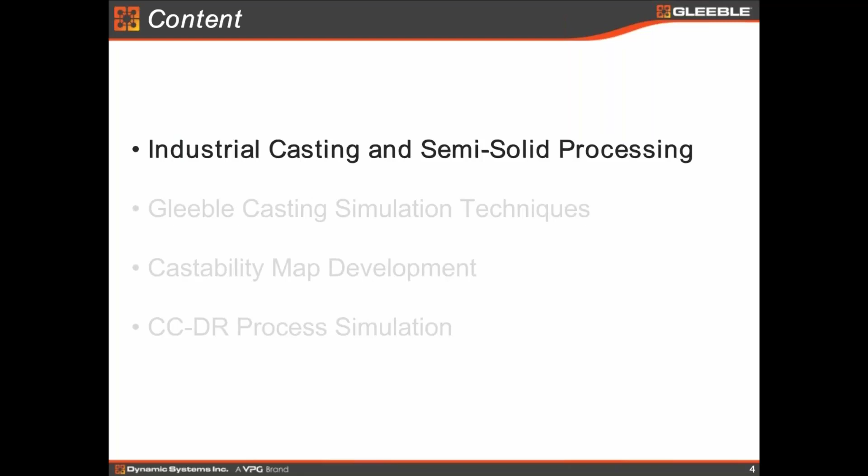So let's talk a little bit about the industrial casting technology development first. We know that casting is a very important part of the steel making process, and in fact, continuous casting is one of the very few technologies that really shape the steel processing industry. As we know now, steel product is really cheap in a way, and that's partly due to the development of the continuous casting technology. And the Gleeble can really simulate the whole process, not just the casting. But today we are going to focus on the casting part of the process.

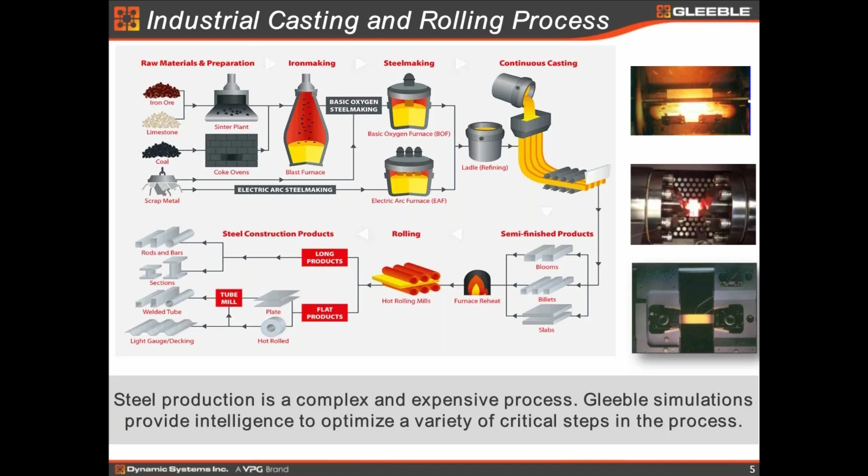Before going further, we'll talk a little about the industry history on casting. Everybody knows about it, but I want to just repeat here a little bit. Casting really in the industry started from 1947 up to about 1974, over almost like 20-30 years.

It's really focusing on the mold casting and the blooming, which means you have to break the ingot to start the rolling after that. And then from 74 to like 89, in about 25, 10, 15 years, continuous casting really started. But then at that time, they were really not integrated. Still needed to kind of separate the casting and rolling, right? So that's why I didn't say direct rolling, still say hot rolling.

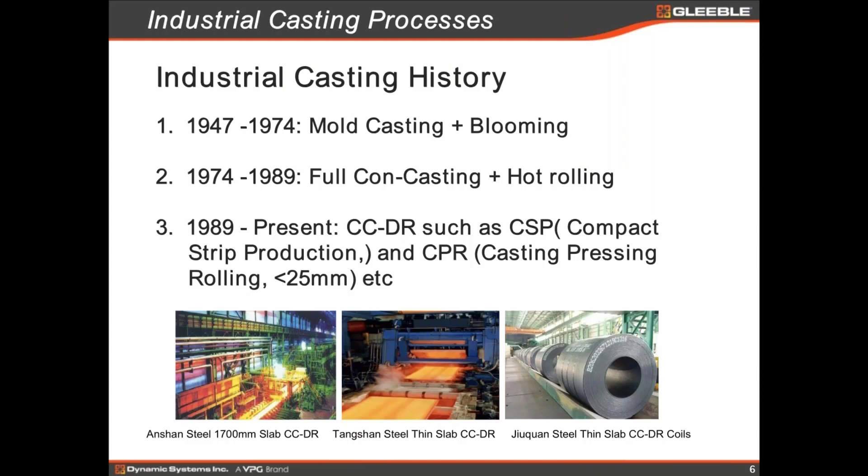Again, casting is just part of the steel processing, so you have to really combine it with the industrial hot rolling as well. But before that, we had hot strip manufacturing or casting technologies developed from thin slab to direct thick strip casting to thin strip casting. But all these things, in order to make the subsequent rolling even more efficient, people are using semi-solid processing as well. In other words, you are deforming the steel billet, no matter how thick it is, while the core is still in a liquid zone. So we call it semi-solid processing.

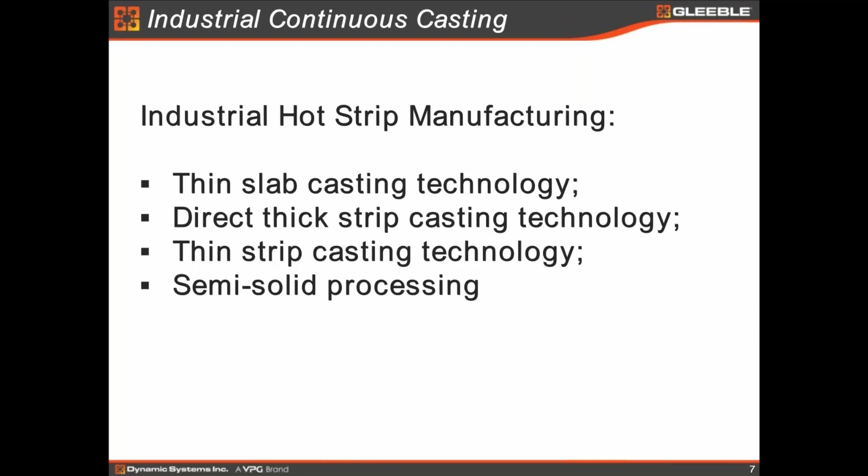Okay, now here are some examples of the CCDR process. From the conventional, we know it's really a slab. Normally the thickness will be around 250 millimeters, and then continuous rolling down to 1.5 millimeters to 25 millimeters thick.

But when the technology develops, especially when thin slab continuous casting technology developed, the length of the production flow becomes very short, from like half a kilometer down to even 100 meters. So this development not only makes steel casting or rolling much more efficient, the key is also that the investment is much less than conventional ones.

So there are lots of technologies out there being used. But again, one thing is very important - no matter what technology they're going to use, as far as I know, I might be wrong, but as far as I know, no technology can produce all the steels in the world yet. So they are still limited.

And that is why we need to use the Gleeble to study continuous casting and rolling to make the castability even better. Specifically, if we are going to develop a new steel, you need to use the simulator in the lab to study before we go to a production trial.

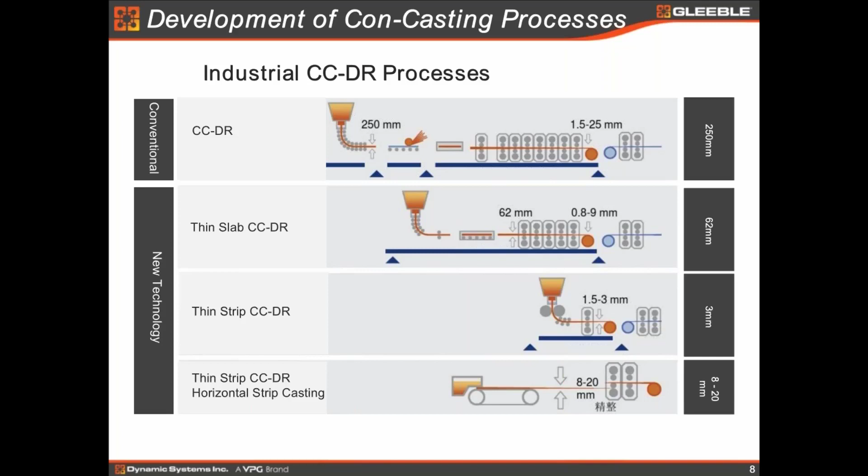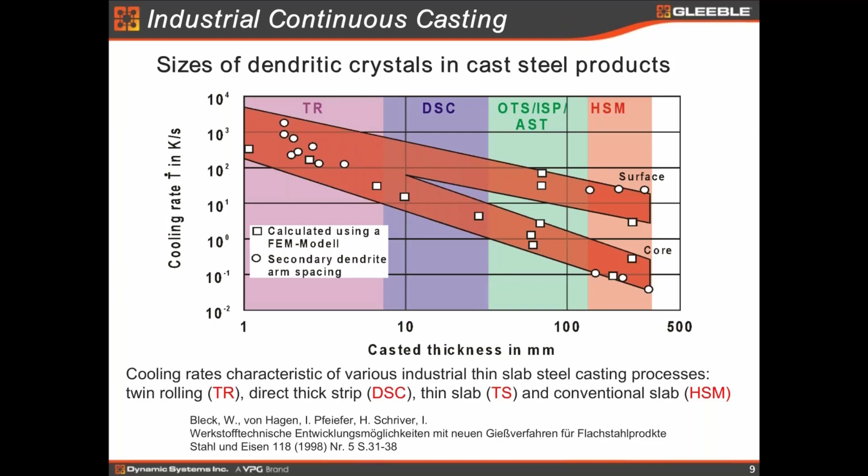And vice versa, when the thickness becomes like 1 millimeter or a little more, then the structure is very fine. And actually, for thin strip casting, the cooling rate you will see in the real production flow could be up to 1,000 degrees C per second. And that is very important to simulate in the Gleeble. We know the Gleeble can quench as high as 10,000 degrees C, so the Gleeble gives us a lot of capability to study the casting and direct rolling process.

And this one shows the secondary arm spacing distance as a function of the thickness. So that's not really something new, but we all know it.

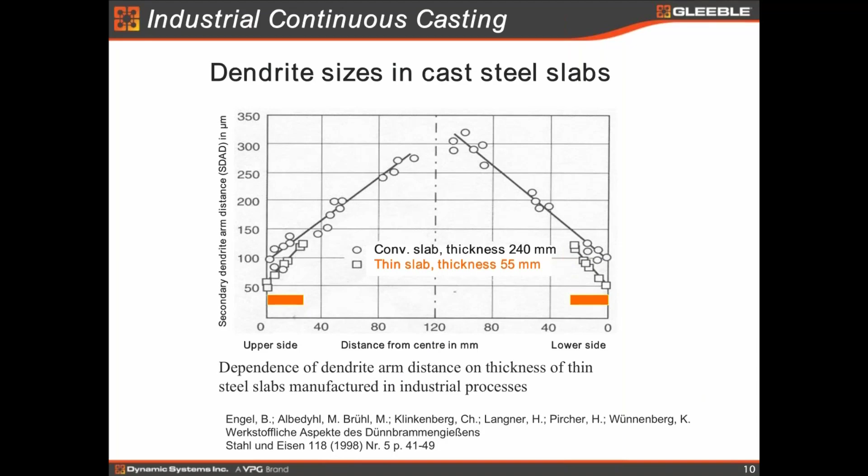So we talk about casting, and we talk about continuous casting and direct rolling. The key here is really, if we want to do continuous casting and direct rolling, we've got to make defect-free billet. If you have lots of defects on the surface, no matter if it's in the corner or the edge, or the longitudinal or transverse, you're not going to achieve direct rolling because you cannot roll the defects into the steel strips, right? So in the conventional way, you have a flame treating, but that's not the way to do continuous casting and direct rolling. So producing defect-free castability is the key to doing CCDR. But the question is how we can achieve defect-free cast slabs or thin strips for direct rolling after that.

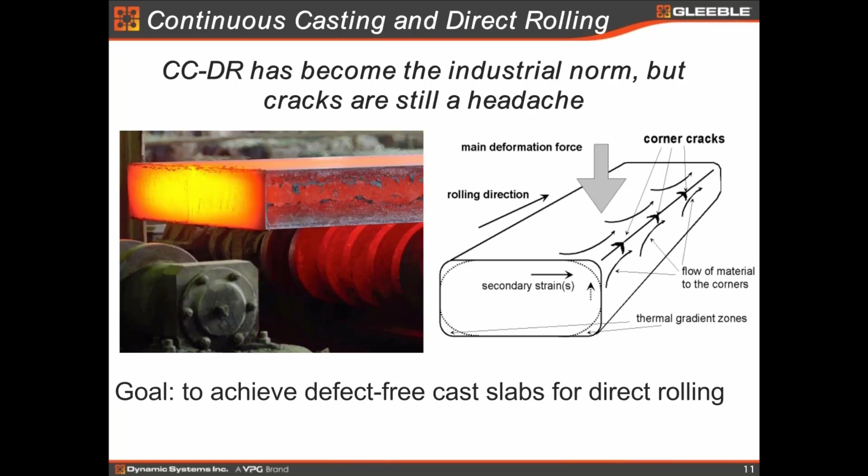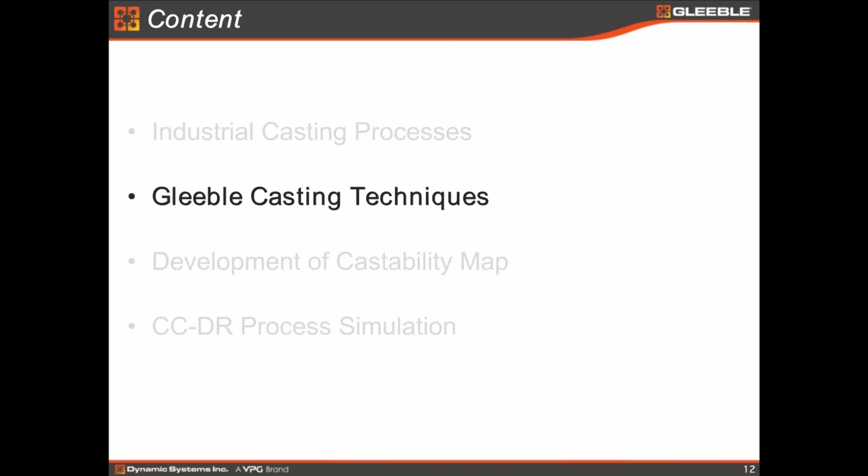So that is why the casting simulation technique is becoming very important. In the next few slides, I'm going to show you some of the casting simulation techniques using the Gleeble. I hope that will be helpful to our researchers to use.

And the first one is what we call flat sample casting, because slab or thin strip casting is all rectangular. So we have developed a crucible that is very simple, just a metal screen, and you put pieces of insulators at the bottom, and you put a quartz plate on top. So you can put a thermocouple at the edge, and then heat it to whatever temperature you want to get it fully melted, and then control solidification. Later on, you can either pull it to check the microstructure or micro defects, and then you can even machine the sample out of it to do the deformation. This can be thick, can be thin, up to whatever sample you have. So it's pretty convenient and very economical too.

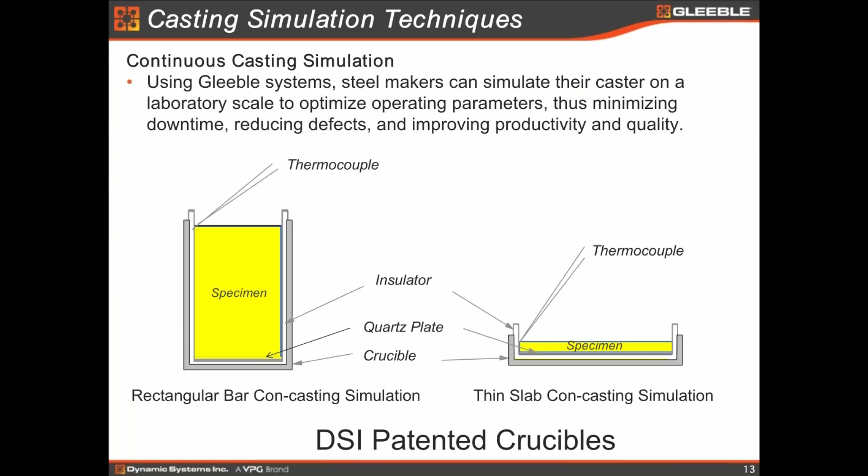This is a very good example of the casting process simulation. In this testing we use a pre-bend specimen. So when you use a crucible that I just mentioned for melting and solidifying, after that you can pull a little bit to simulate the unbending or bending process in the casting process, at a certain strain rate in the range that you want to study. You can also use the quenching spray head to simulate the secondary cooling that you see in the real casting process. After all the simulation, you can check the microstructure, check it to see if there is any defect. You can even cut samples out to do some mechanical or ductility testing.

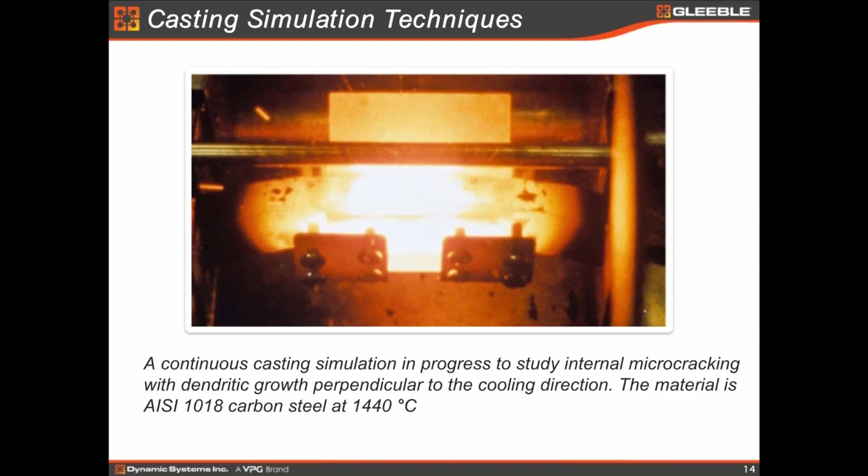But the most popular way that our Gleeble users have been using is really this testing technique. I would rather call it the Dr. Suzuki methodology, because this methodology was developed at Nippon Steel in the early 1980s. He used a 10mm diameter bar, and used a quartz tube to slide onto the cylindrical sample. We know the quartz softening point is more than 1500 C, so for most steels you can simply just melt it to simulate the steel in the mold, and then control solidification to simulate the casting cooling rate to generate the kind of dendrite you will see, and then simulate the unbending process and subsequent hot rolling process by doing the hot ductility test to measure the reduction of area.

That way you will know, for this steel and this kind of casting, during solidification and unbending, bending, or even rolling, at different temperatures what kind of ductility you have, because after all it is ductility that really affects the defects. Everything really comes down to material ductility. And of course you have to have stress — if there is no stress, then you will not have any cracks. So there are lots of things you have to study using this kind of testing, in terms of mechanical stress, such as in the alignment roll or backup roll, and also thermal stress that might be generated during thermal gradient solidification. So controlling the thermal gradient, controlling the cooling rate, controlling the solidification is very important.

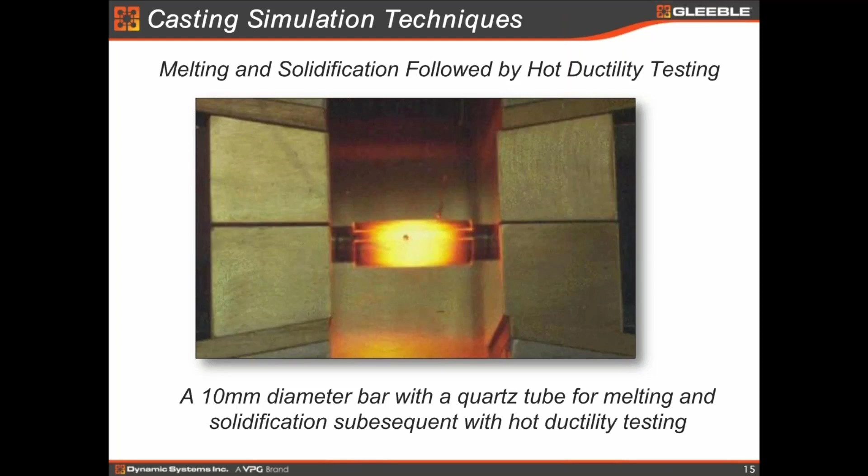So this is a very popular technique that people are using. I would say every steel manufacturer who has a Gleeble uses this technology to develop castability for all kinds of steels, even new ones they are developing. I will talk about the castability method later, but for this testing technique alone, I want to share some of my experience with you guys, because after all this test is not that easy since it involves melting. When you're dealing with liquid steel or metals, some beginners get kind of nervous. But we have been using this for almost 30 years now, so it's not really a big deal, though there are still some tricks you need to be aware of so you can make your test kind of routine.

So the key here is this: firstly, before melting, I would definitely suggest you slow down the heating rate, because otherwise controlling the liquid will be tough. As you can see, we have a lot of holding time. You can manually adjust the melting temperature or casting temperature, and then control solidification.

There are some things I want to mention here. Firstly, as I mentioned, we use a quartz tube, so the size of the quartz tube is very important. If you do not select the right inside diameter, the quartz might break if it's expanded too much. A rule of thumb is, if you know your steel's thermal expansion coefficient with the phase transformation, you try to estimate the final diameter you would have at the melting point. The inside diameter of the quartz has to be a little bit bigger than that. Otherwise, you would break the quartz, because quartz is very brittle.

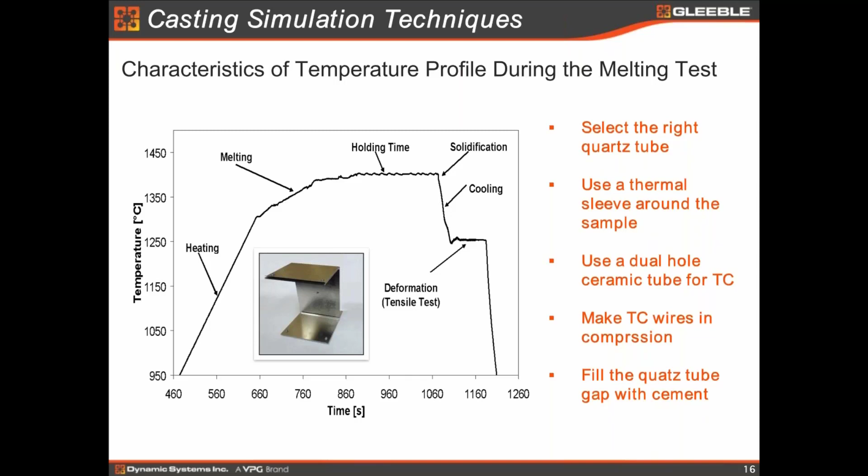So these are the tricks I hope will be helpful when you do this kind of melting solidification test. Now I will explain in more detail how to use this technique to develop a castability map, because after all, you need to tell your cast operator how to cast your steels, whether it's the current one or a newly developed one.

So let's come back to the test methodology using this Suzuki method. Normally you could use this kind of methodology to do that. This left one is really to simulate the casting and the direct rolling. So what we do is heat the specimen up until melting, and then control solidification to a certain temperature, whatever it's in during the casting temperature region or during the rolling region.

You can do all types of testing to measure the reduction of area, the ductility, and then at different soaking time, strain rate - all these factors you can put into consideration. That way you can have a ductility versus lots of factors in terms of temperature, strain rate, holding time, and all that. So that is the testing method using the Suzuki method.

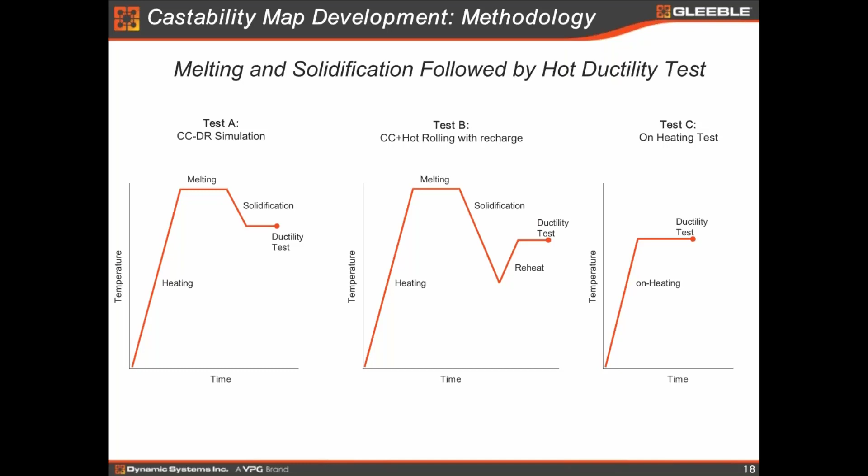And by this design, you can know how bad this casting ductility is. We all know the material ductility will become very bad when it's heated. And actually, the fact is the higher the peak temperature, the worse the ductility is. So melting, of course, is the worst. That is why the melting is so important.

And if you see the low ductility, you want to know why. I mean, you only know the origin of the low ductility, then you can improve it.

So at Nippon Steel, they use SEM, of course. I always say the Gleeble is the bullet making machine, and SEM is just the machine that takes the Gleeble sample as a bullet. Without a bullet, the machine gun, or the SEM, is useless in a certain way. So Gleeble really can generate lots of samples for your SEM because it's even more useful. So to study the origin of the low ductility, you need to check the fracture surface. By examining the fracture surface, you know why there is low ductility.

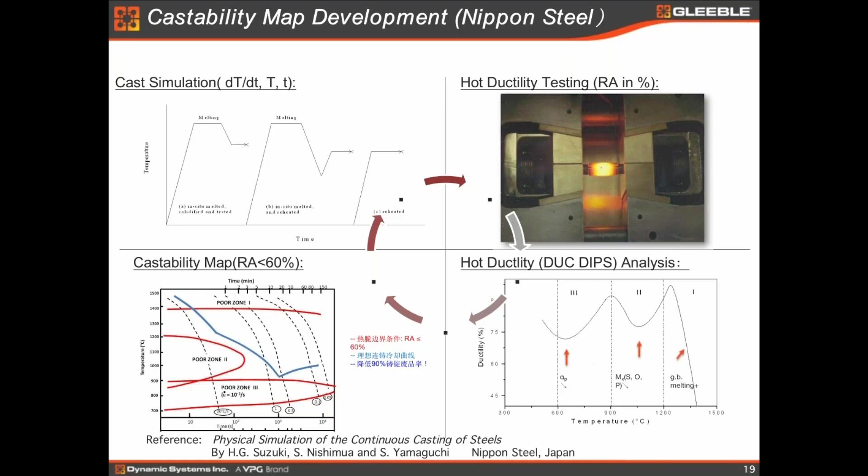Their surface treatment rate dropped from 45% down to less than 5%, which makes CCDR a reality. For all new steels being developed, you have to develop a castability map before telling your caster operator how to cast, because speed relates to strain rate in terms of Gleeble simulation, cooling rate, and solidification rate. It's all important, including when to unbend. This technology is very important, and I hope it's useful for your new steel development and casting.

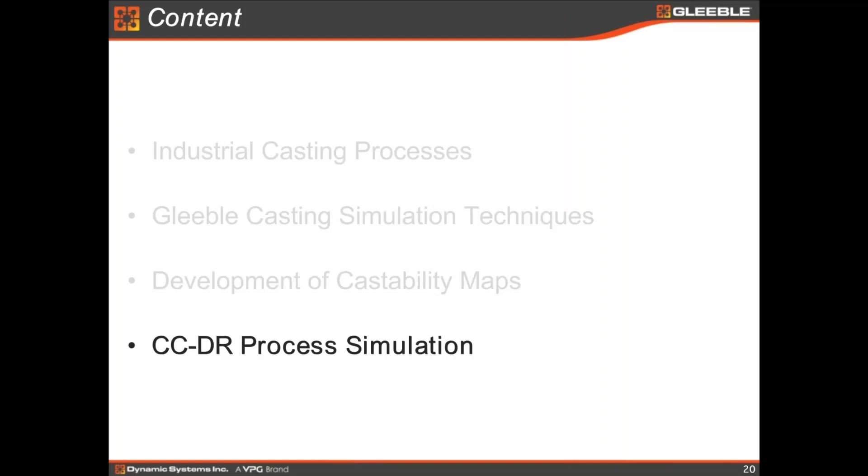Now I'm going to talk a bit about continuous casting directly, because after all the metal has to be processed to become the final product our steel customers can use. From this figure, you can see the history of casting and rolling. From the right, that's the older method, probably from the 1940s to 1970s.

People did cold charging — you cast it until cold and reheat it through the walking beam furnace. Later it became what's called hot charging, to save energy and time. Then we got direct hot charging, just like the second schematic testing scheme I showed in the previous slide. Now almost everybody uses CCDR to produce all kinds of strip thickness using hot strip mills, whether 5 stands or 7 stands, depending on the thickness you want to produce.

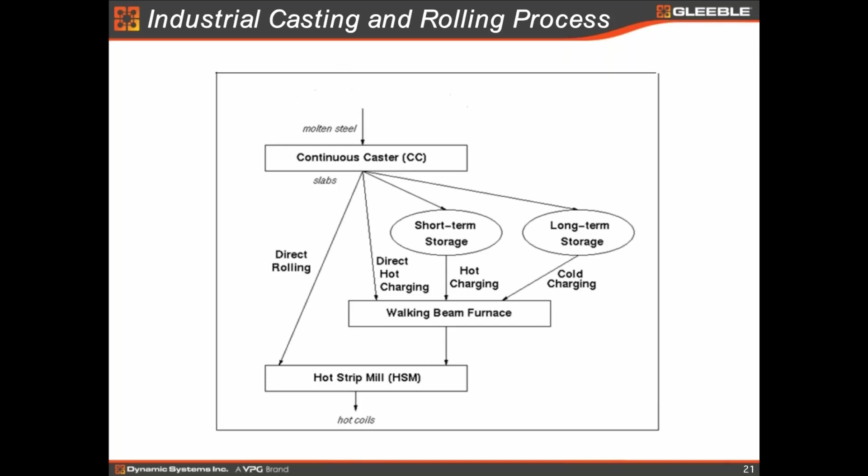Fortunately, DSI has developed a CCDR simulator, called the HDS V40. HDS stands for hot deformation system, and V40 means vertical 40-ton machine. We use a very large sample — a 10 millimeter thick, 50 millimeter wide, 250 millimeter long specimen, depending on the free span you want to set.

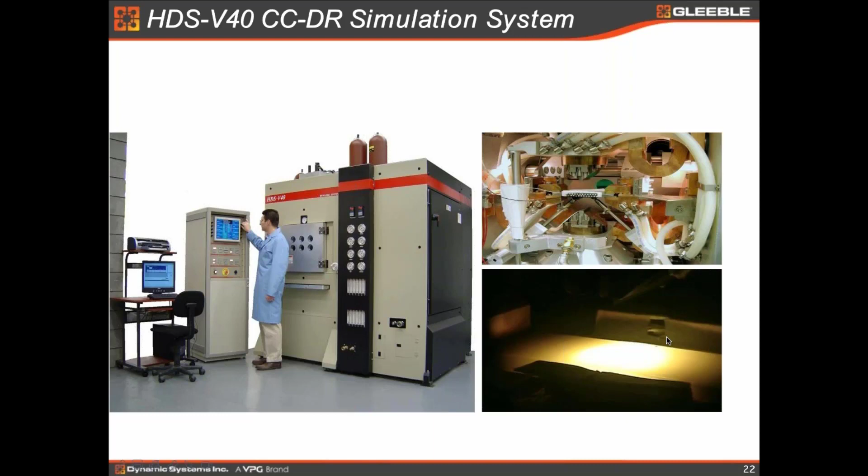You use no crucible, which is really nice — you can bend it to whatever shape you want for testing. It's very economical, very cheap. You can heat it to whatever temperature you want. Now I'll show you a video simulating the CCDR process on the Gleeble HDS V40.

You see it's heating up a bit slowly, but you'll see a molten zone forming in the center. You'll even see some gas popping up, and the center molten zone is generating gradually. You can get this formed without a crucible, as long as it's not in a vacuum — normally inert gas is better. So it's kind of fully melted — you can see it bubbling in the center.

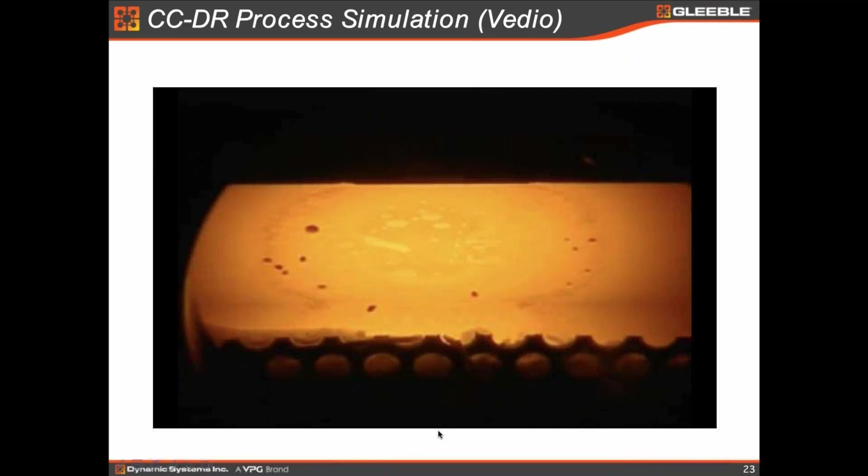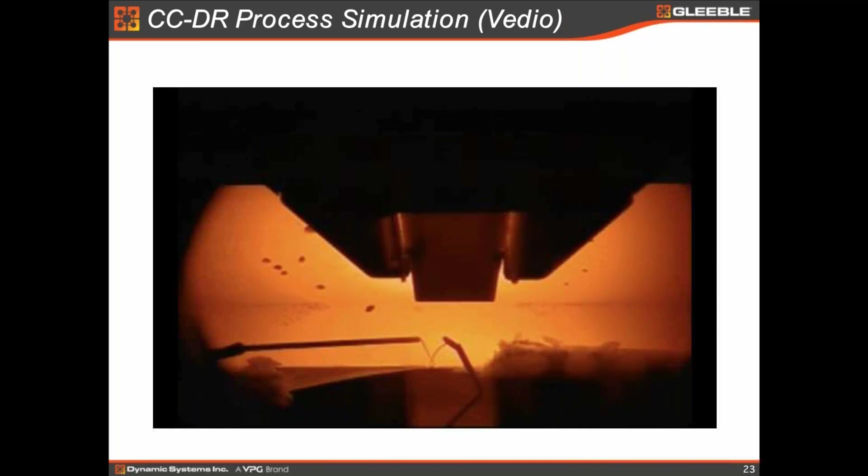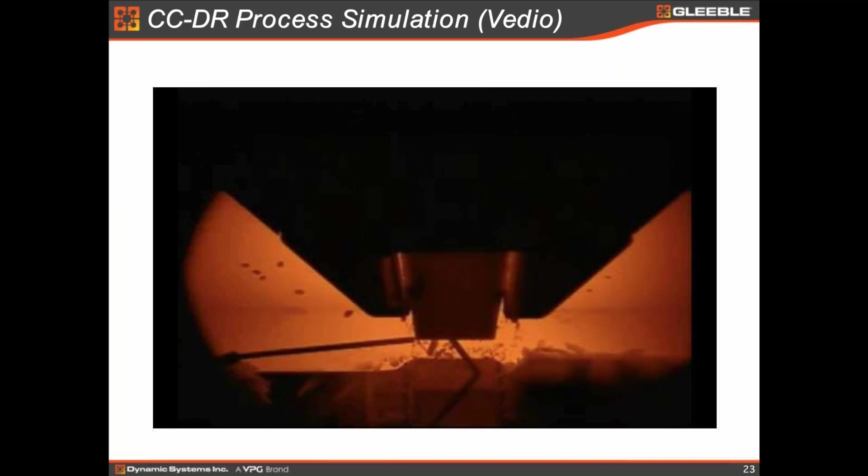Then you control the solidification, and afterward you can do the direct rolling right away, since it's all in-situ simulation of the CCDR process. You can do as many hits as you want — 1, 2, 3, 4, 5, whatever. It's not a problem. We can control the temperature, the strain, the strain rate, and the interpass time, just like in your real process flow.

This photo is shown deliberately to show the kind of liquid we deformed while the specimen is still in the semi-solid region, so you can see some of the mushy zone. But as I'll show you, you can deform at any temperature, any strain rate or strain you want. You don't want to really make it mushy, but I propose to do this because the HDS can do whatever you want to simulate.

After that, I want to show some of the microstructure of the melting and solidification with two kinds of cutting: one, the flat section parallel to the surface, and a longitudinal, vertical section, which we call the long section. Then we will examine this microstructure from 1, 2, 3, 4, 5, from the solid to the as-cast structure.

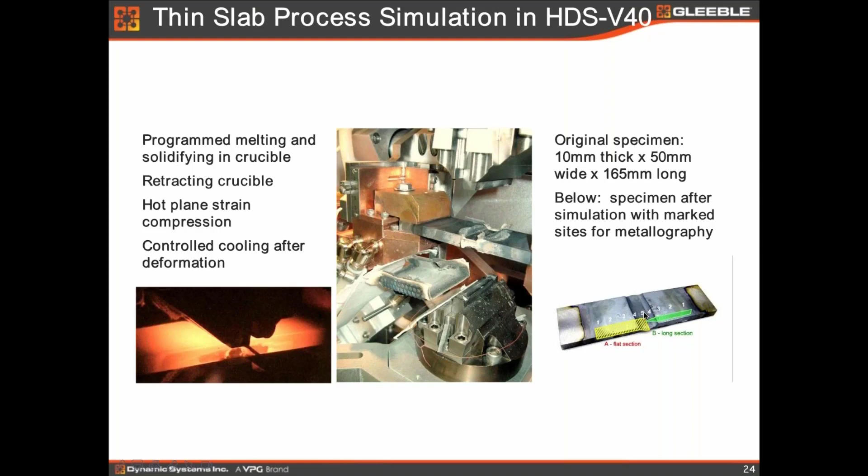Here you can see in the long section from 1 to 3: zone 1 is solid, about 1,300 degrees, and we see a normal Widmanstatten-type structure, but we have preserved non-metallic inclusions. This is to show you why it's changing at a different temperature, like in zone 2, where you see some non-metallic inclusions have become fragmented.

This is because of the mushy zone, the semi-solid zone. In the fully melted zone, which we call zone 3, we see dominant spherical inclusions along the boundary of the columnar dendrite. In other words, we can generate columnar microstructure or as-cast microstructure.

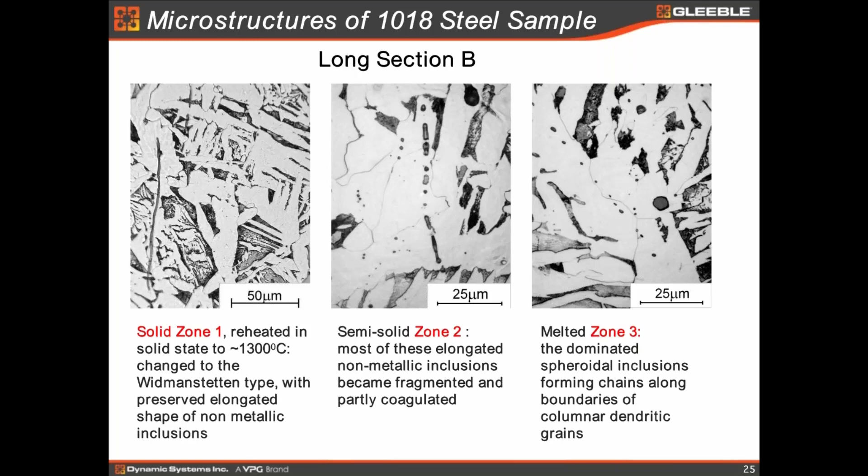If you want to see the flat section A, after the deformation, section A, zone 5, is the deformed zone. We can see it's a very common ferrite-pearlite structure. If you want to see in more detail, you see ferrite, lamellar pearlite there.

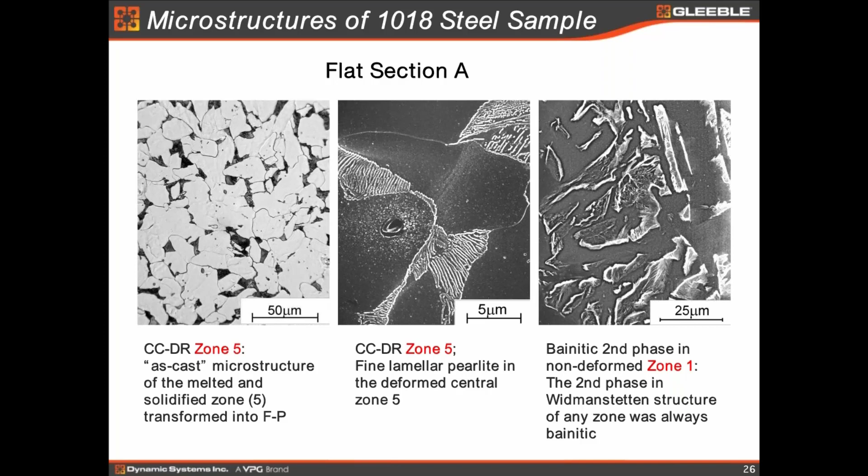Actually, in most of the as-cast deforming zones, we see bainite as a second phase in all these zones. Even in zone 1, we see the second phase of the bainite structure. So again, as I said, this simulator can simulate all kinds of casting procedures.

This machine can actually, as a feature, shift the specimen longitudinally. In other words, you don't have to deform in the melting zone. You can shift the sample sideways to deform in a different zone. That's possible. But I want to make a case study for a steel with low carbon, 0.07 carbon.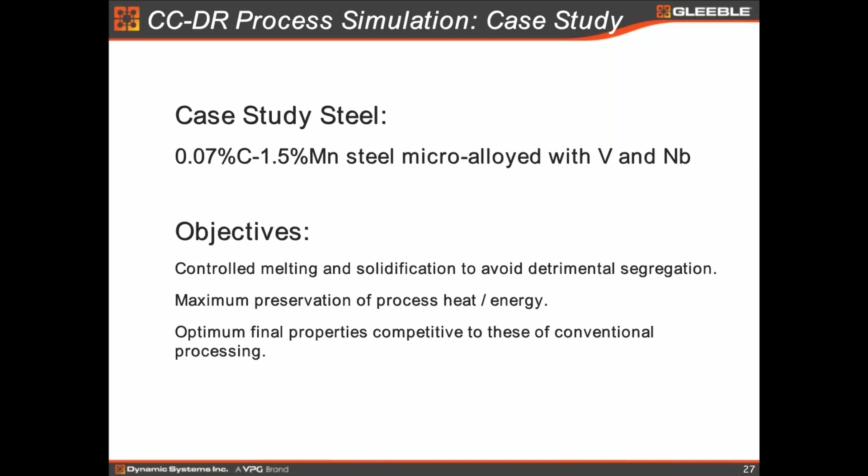With 1.5 manganese, micro-alloyed with vanadium and niobium, to do some deformation simulation, casting deformation simulation, to see the microstructure and the flow stress. One sample we heat up to 1250 with two hits: 0.35 strain at 1150, and 0.55 strain at 1000 C. The second one we heat to the same temperature, up to 1320, with the same two deformations.

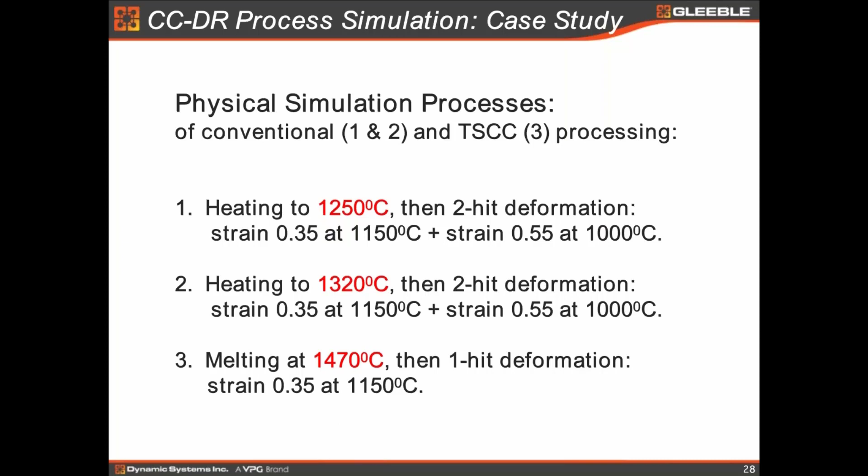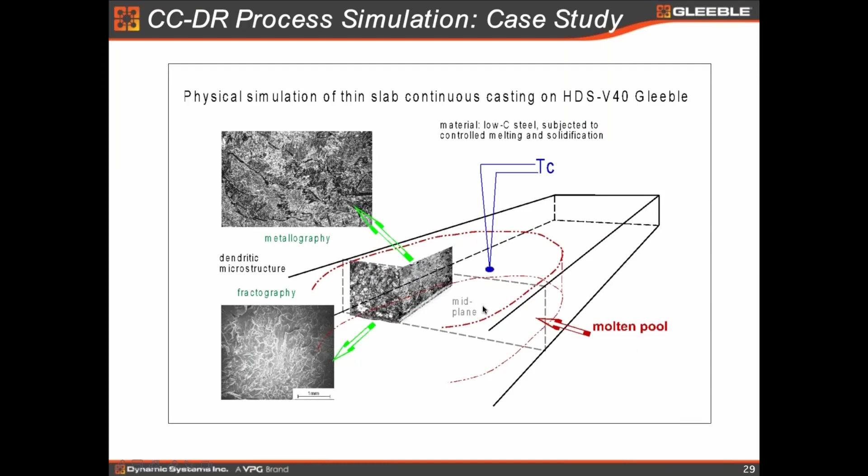The third one we heat up to 1470 to melt the sample and do just one hit at 1150, 0.35 strain. So we will cut the specimen crosswise, which we call the middle zone, middle plane, and in the longitudinal direction to see the microstructure.

You can see, after melting and solidification, we see columnar structure with ferrite segregated along the grain boundaries. So you see the grain size of the columnar dendrite grain size.

If you want to see the inside structure, within the dendrite grains, we actually see some kind of rib-like structure.

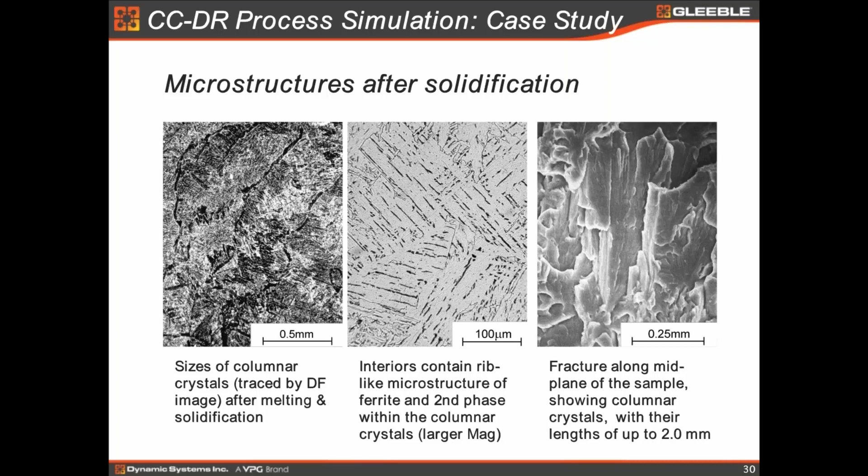If we cut the specimen along the middle plane, we actually see a dendrite grain size of up to 2 millimeters, which is very close to the dendrite grain size that we see in the real thin slab casting process, about a 25 millimeter thick slab casting. So again, the HDS is really comparable to what you see in the real casting process.

Here is the flow stress curve that we measured at three different peak temperatures. What we can see is, of course, you can do multiple hits, about 5 or 7, no problem, because the HDS also has a feature of hydraulic control, so you can control the strain rate and temperature intervals very well.

Here what we see is the finer the grain, the larger the flow stress you observe. You see the low flow stress at the 1470 melt zone. We deform at the same temperature; the only difference is the grain size. So the finer the grain size, the larger the flow stress you get. The same for the 1000 C deformation, heat at 1320 and 1250.

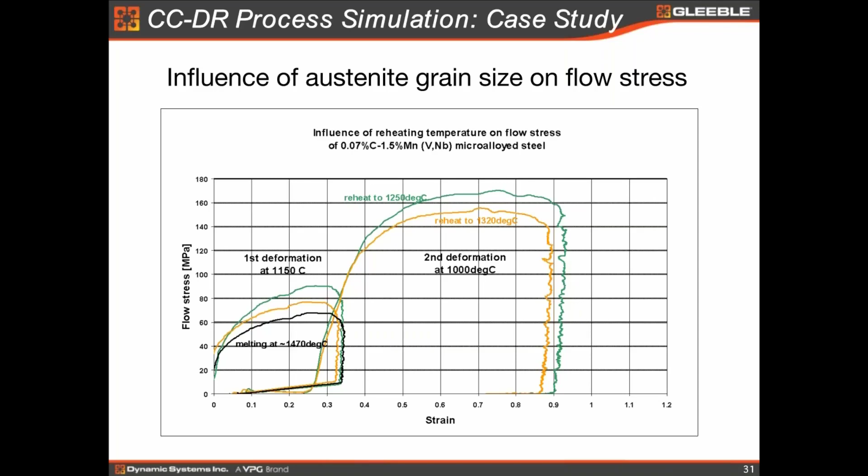That's why we need to make sure of the peak temperature that we simulated, because it affects the deformation resistance that you will see during deformation.

These are the microstructure photos for process 2 at different temperatures and different strengths. D is the deformation zone, and this is the non-deformation zone. You can see the structure after deformation.

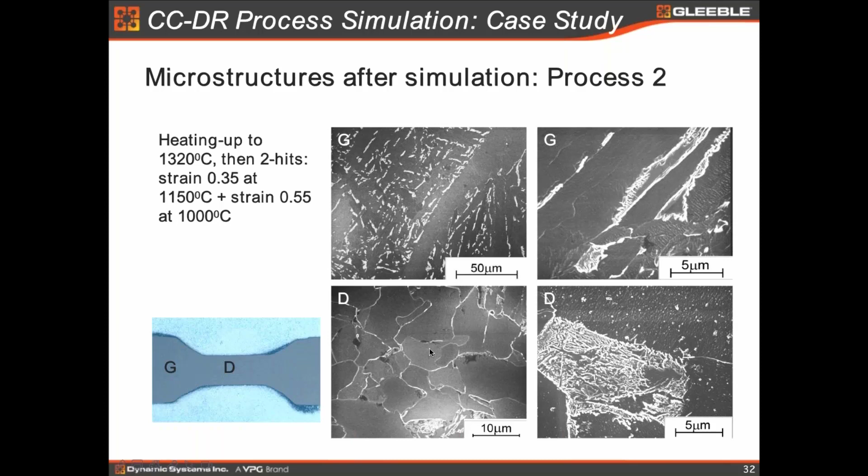The same for process 3, with as-cast and the solidified deformation structure. These are the things that the Gleeble can do to check the microstructure, because after all, it is the microstructure that decides the mechanical properties.

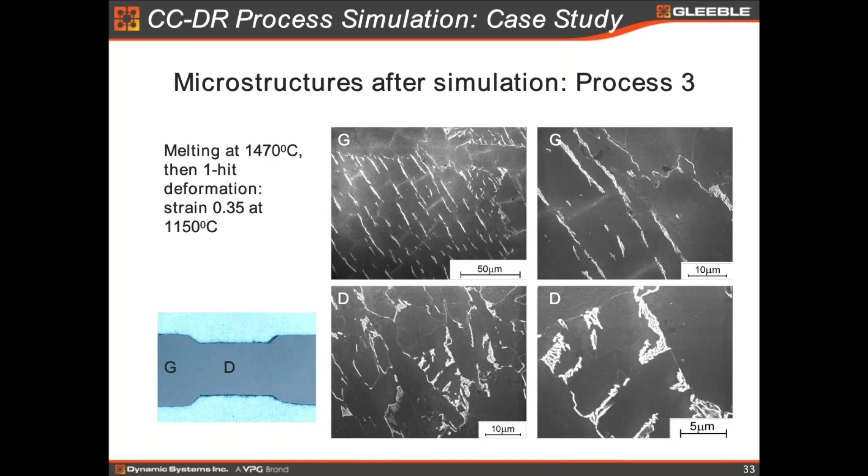CCT is also very important to measure. We could actually measure the CCT on the HDS V40 as well. So these are examples of the case study.

I want to make a conclusion for this case study. I mentioned already, but I want to summarize it. Firstly, the HDS V40 really can simulate the true melting and solidification situation that you see in your real process, followed by a multiple-step hot rolling process as you see in your project flow.

The reliability of this simulation process is very positively verified by the mechanical and metallographic observations, as we can see, using the non-metallic inclusions.

Also, as I just mentioned, the columnar grain size that we achieved using this methodology is equivalent, or comparable, to what we see in the industrial thin slab continuous casting process.

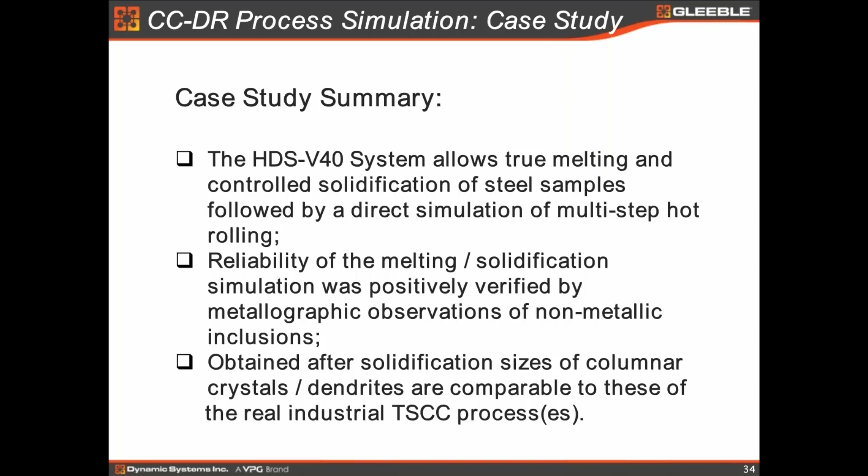Before I finish, I want to propose a SICO procedure, because it's a really good testing procedure that all Gleeble users could try, as it can be applied in many different applications, not only for crack susceptibility study. We can optimize the process, as some of you have seen, to optimize the crankshaft process, but here you can use this SICO procedure to test the CC-DR process as well.

The way I would propose to do it is that you use the crucible to melt the specimen to control the solidification process, and then you simply compress the specimen at a certain temperature and a certain strain rate. You can either measure the mechanical property afterwards, or check the microstructure at the different testing conditions, and also measure the onset of cracking.

by measuring log D over D as the ductility. Using DIC, digital image correlation technique, is perfect for checking the onset of crack strain.

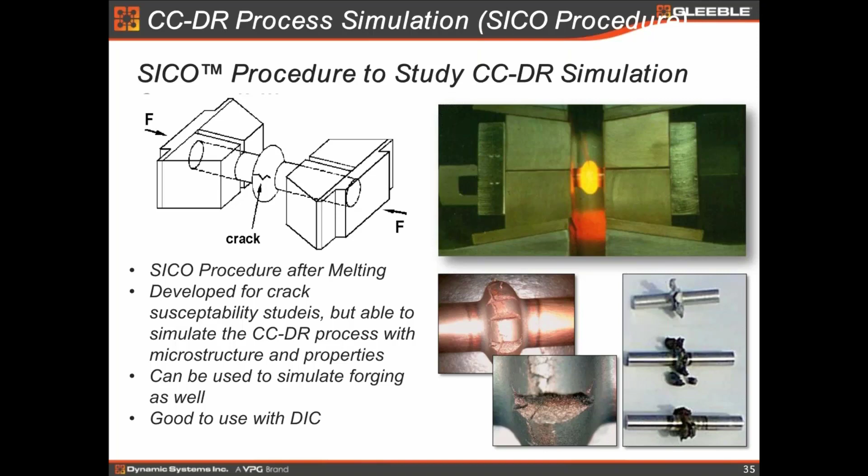I personally, honestly, have not really used the SICO to simulate the CC-DR yet, but it's very straightforward. If some of you are interested, you're welcome to try it, and if you have any problem, you're welcome to contact DSI, anybody. We will be more than happy to help you.